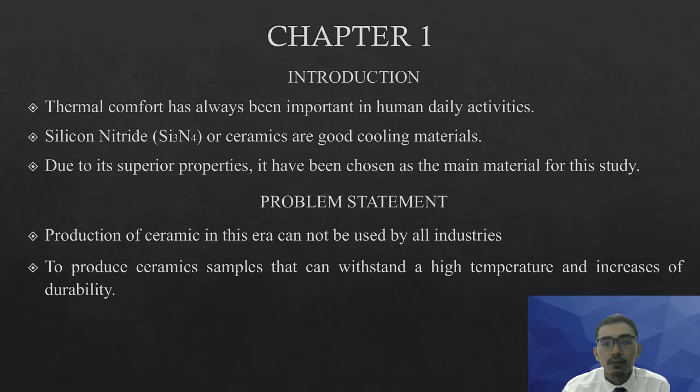I will continue with the research objectives. The first one is to fabricate ceramic samples with different contents of polymethyl methacrylate, or PMMA. The second objective is to measure the mechanical properties of ceramic. Next is the scope of research. The research will examine the powder processing, ceramic fabrication, powder or ceramic characteristics, and ceramic performance. The process will determine the ceramic sample porosity and thermal conductivity.

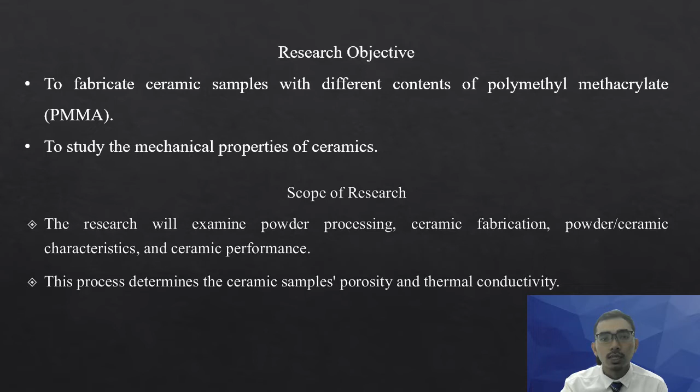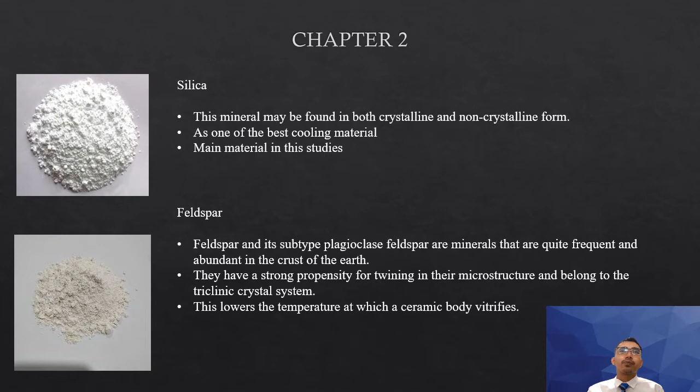The next material is clay. When the body of the ceramic is heated to the temperature at which it is fired, the organic particles that compose it are destroyed by the heat and replaced by voids. The pore-forming agent that was utilized will dictate the morphology of these voids. Clay is a substance that, depending on the amount of water it contains, can quickly go from a viscoelastic state to a brittle state.

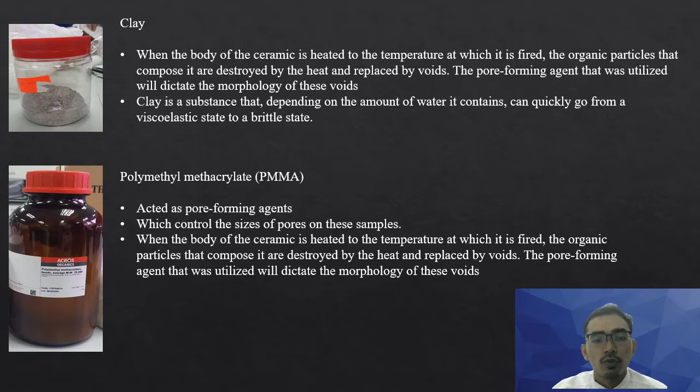Next is polymethyl methacrylate, or PMMA. This material acts as a pore-forming agent. The pore-forming agent's function is to control the size of pores created inside the sample. When the body of the ceramic is heated to the temperature at which it is fired, the organic particles that compose it are destroyed by the heat and replaced by voids. The pore-forming agent that was utilized will dictate the morphology of these voids.

In this chapter, I would like to present the methodology. Methodology is the big picture plan and reasoning behind the research project. It means learning more about the methods being used in the study and the theory or ideas behind them, to come up with a plan that fits the goal of the study. It will include a few tests to determine the durability of the sample.

Next, the mixture will be put inside the bottle containing around 30 milling balls, which will be rotated for a duration of 3 hours. The function of this step is to grind the mixture to form a fine grain powder. The next step is to continue with the process of sieving, which is to separate the granulate powder from the fine grain powder.

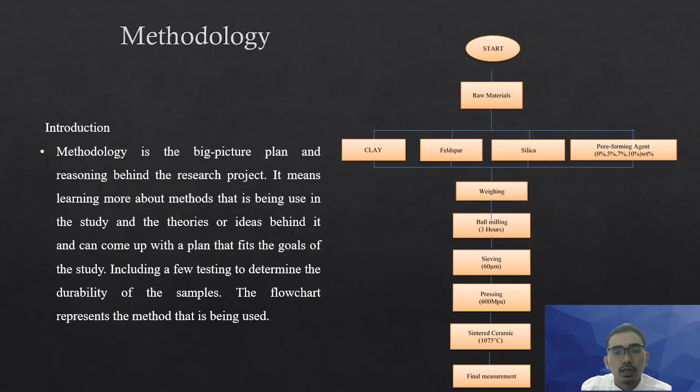The fine grain powder is then transferred into the sample molding to be pressed at around 600 megapascal to make sure all air trapped inside the powder is released. The molding is then put inside the furnace and burned at around 1075 degrees Celsius for a period of time. Then the samples are brought out of the furnace and cooled down at room temperature. Then we will proceed with the testing of material.

For further understanding, I put an infographic for each process and the equipment used. The first one is the collection of raw material, which is the clay, feldspar, silica, and pore forming agent. Followed by the ball milling process for 3 hours, followed by the sieving process to differentiate the granulate powder and the fine grain powder. Next is to use the pressing machine to press the powder into the molding samples.

And the samples will be brought into the furnace for the sintering process at 1075 degrees Celsius, and finally the material will be cooled down before proceeding with testing.

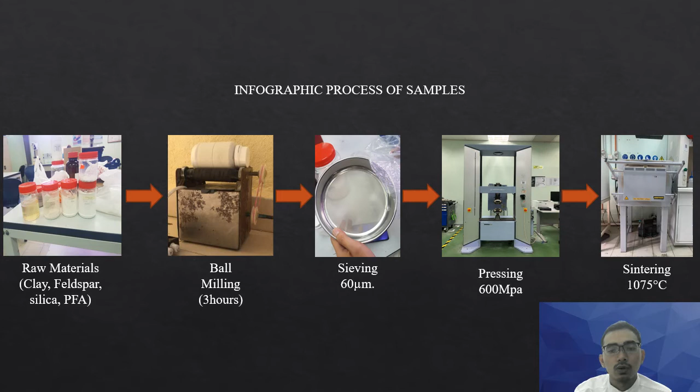For this slide, I will explain the weight for each material. As the table presents, this is the calculation for the mass of material needed in the studies. The amounts of the 3 main materials, which are clay, feldspar, and silica, are kept constant for each sample. Only the PMMA, or polymethyl methacrylate, the pore forming agent content, will be changed based on the percentage that has been set in the studies.

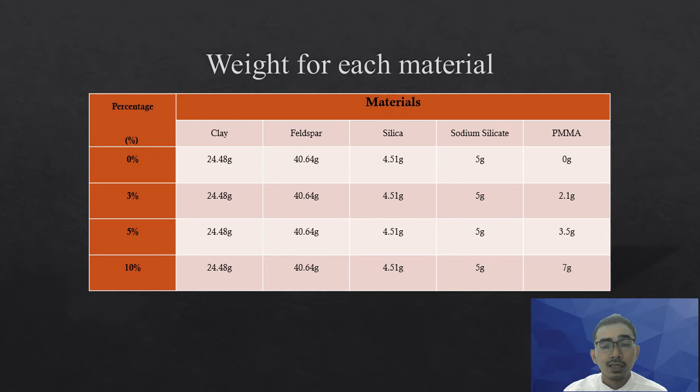Now we will proceed with the testing process. The first test is the X-ray diffraction analysis, or XRD test. The X-ray beam will be projected onto the sample to determine the crystalline structure of each sample. Next will be the density and porosity test, to measure the density and porosity of each ceramic sample. The sample is immersed in a beaker of distilled water and kept for a period of time.

Next is the thermal conductivity test. It is a method of measuring the heat conductivity of the sample. Two ceramic samples are put together and a probe is placed between the samples while the sample is heated for a period of time. Next will be the bending test, a 3-point bending test to test the elasticity of the samples. Based on the 3 points, a constant push of 600 megapascal is used to test the elasticity of the sample.

Finally is the scanning electron microscope, or SEM. Its function is to photograph the surface of samples. The sample is put under the microscope to observe the surface of the ceramic.